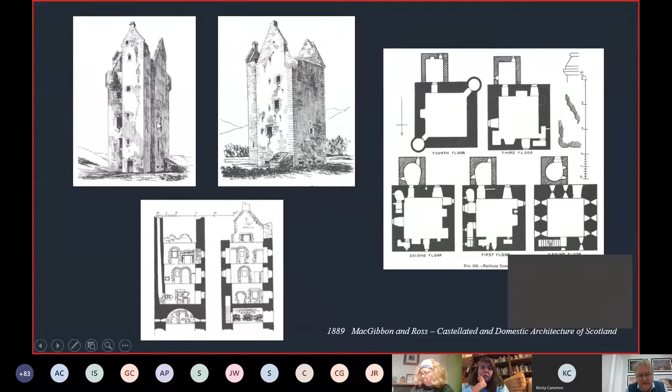MacGibbon and Ross in the 1880s did the first survey of the building that we know about, with the help of a local architect as well, who sent plans, and they did a basic phase plan. And the very obvious thing to say is, in terms of its evolution, the stair tower is an addition, and that's clearly shown here. So that's a stair tower. You can see it very much looks like it's stuck onto an earlier building. So some basic facts of the tower's history were known.

This is our earliest photographic image, circa 1880, a fantastic image showing the tower in splendid isolation, with the cottage that still survives as a ruin on its side, but at that stage still retaining its thatched roof. And you can see that there's two chimneys, and here there's an internal cross wall, and you'll see the remains of the fireplace in a slide later on.

If you just bear that in mind, by the beginning of the 20th century, the cottage was beginning to become derelict, and by the mid-century, half of it had already gone, and the thatched roof on the other side of it had been covered in crinkly tin zinc roof. But very much both the tower and the cottage were derelict, completely roofless by the 1950s. A later agricultural building was built up against the side. This collapsed probably about 10 years ago or so, and so we're dealing really with the ruin of the cottage today and the tower itself.

So what have we been doing? After the history, we did an assessment of the building in 2017, which was an initial look over as access permitted, and it's not a safe building, so we had to be very careful with what we saw, and we didn't get into many areas. That led on to a building recording exercise, and so I'll take you through our methodology and what we've been doing at Fairburn.

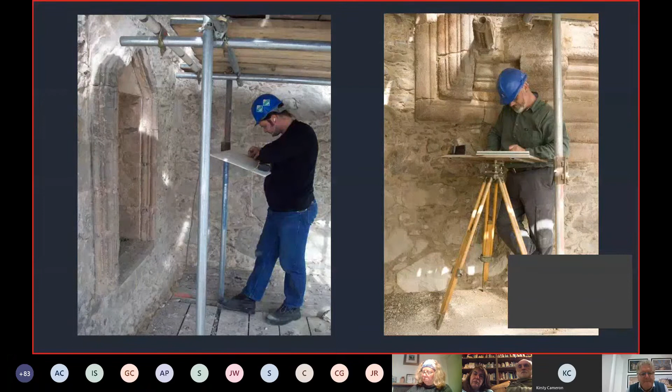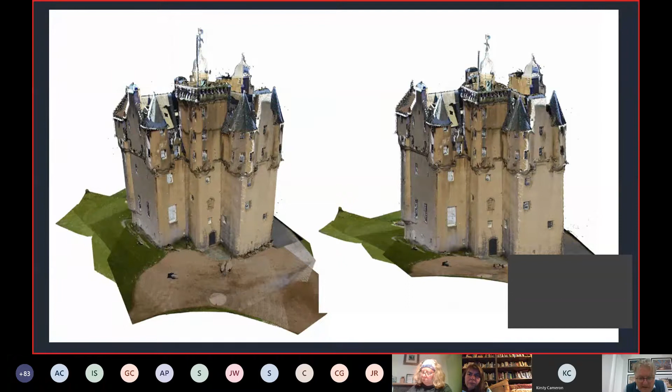In terms of digital techniques, it's a combination of techniques to best effect, focusing them on the subject, using whichever one works best. So here we have Craigievar Castle, which we did a few years ago, with coloured laser scan imagery to create a three-dimensional model, and that's to act as a survey control. Given that you can't just put a tape measure up 6 stories, you need some way of controlling your images, and from that you can generate two-dimensional projections.

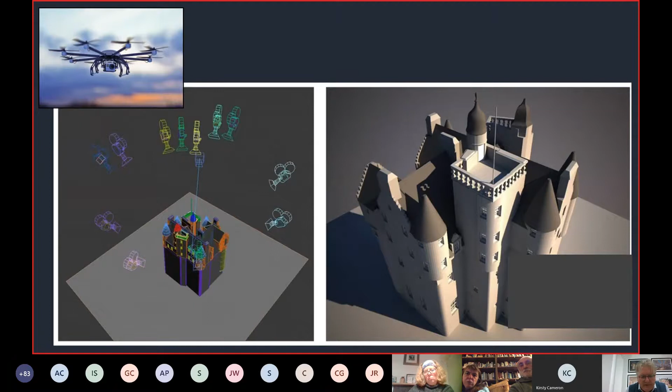We've also at Fairburn and at Craigievar used digital modelled photography. This at both sites involved using a drone to take stereo pair photography from high level all around the building, put it all into a computer, and it creates a three-dimensional digital photographic model of the structure, which is an incredibly powerful tool, particularly where you can't get to roofs and the upper parts of a ruin without scaffolding.

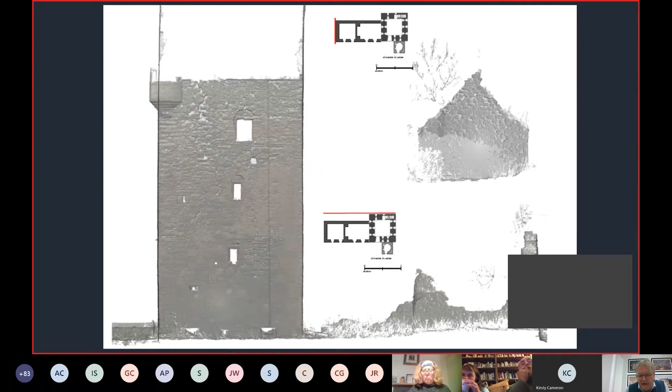So at Fairburn, this is one of the elevations of many that was generated from the laser scan data. So this is the grayscale data of the back of the tower, which we then use as a basis for our survey work. And I'll take you through a few of these. It's an incredibly powerful tool.

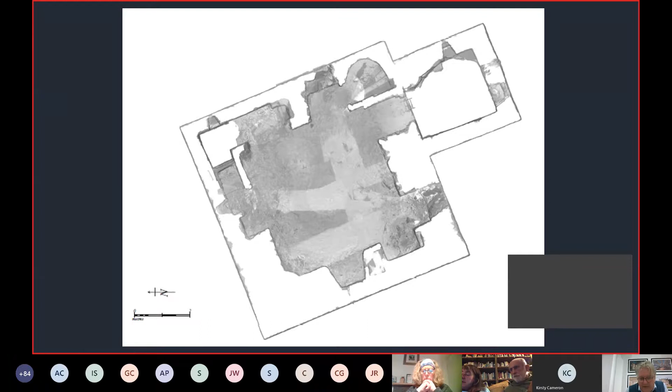So floor by floor, that's second floor. You can see the different chambers, third floor. And these are all perfectly lined up above each other. And there's the wall heads, and you can see the bartizan turrets at the very top, and another fireplace. The top of the stair tower had a little cap house.

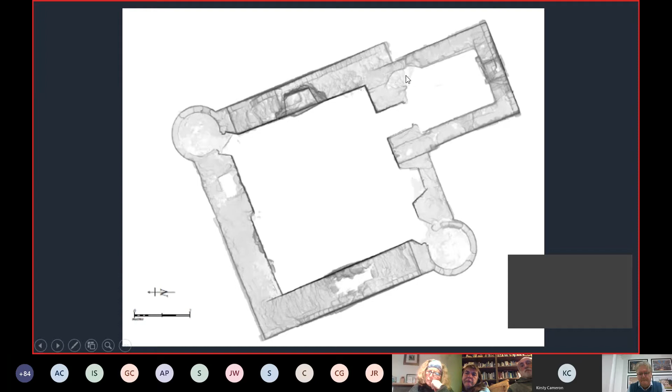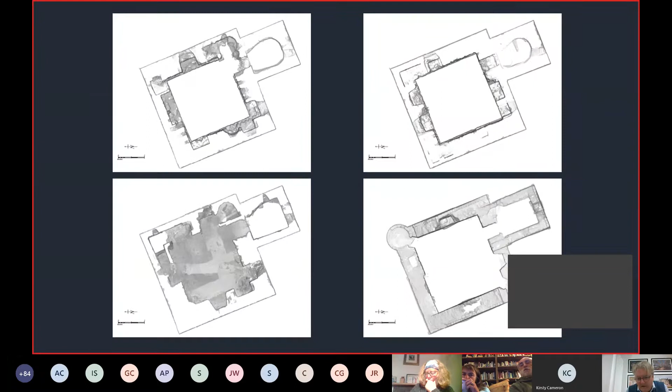And you can just see how incredibly easy and useful this is as a tool to survey a building. And bear in mind, it's a dangerous structure, so physically you're not even getting near it in order to collect this data. There they are in sequence, one above the other.

And it gets really fun when you have this modeled imagery for the interior as well. You can do slice throughs vertically and horizontally in any direction you wish. So we've actually had a great deal of fun with this survey, but you can immediately see how complex a building it is and how many mural chambers and fireplaces and windows and so on.

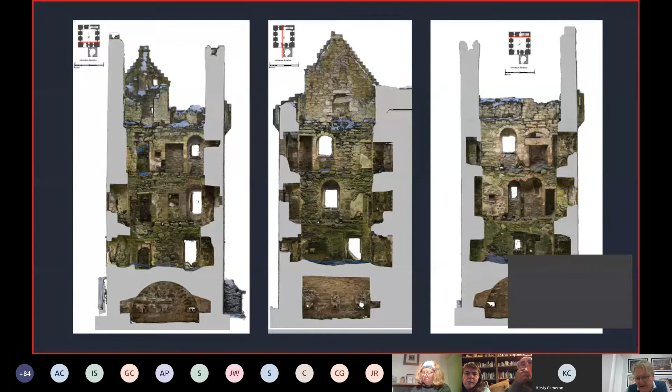So I think the actual survey on site with all of this digital was only a few days, and we used it to generate very detailed drawings. And so this is an example of the elevation done from photographic modelling, and then literally tracing it off. And you can see the sorts of things we're looking at. These are historic surfaces, lime finishes that survive, the individual stones, the principal features.

And as you stare at it more and more and look on site, you can pick up different phases. And so we know the stair tower is an addition, but we quite rapidly just worked out that the top part of the tower was another addition. So the original parapet was built off, and they built an entire additional story on top of the building.

And so we're colouring those phases, and you can very easily and quickly communicate the history of the building by doing that. And so you've got this original tower, which is the Mackenzie of Fairburn Tower from the 1540s. We think the stair tower, the bartizans and the cap house were all added in the early 17th century. And then a whole series of later things, early windows got blocked up and so on.

And you can see here, this was the agricultural shed which had collapsed, but left a scar on the side of the building. And here we are systematically going through the evidence, both to try and create a formal record of the building for posterity, to really understand its evolution, and a lot of this information is then fed into the conservation planning process and information that the architects will take forward. And they've used these drawings as a basis for their own drawings. So it's all quite an integrated procedure.

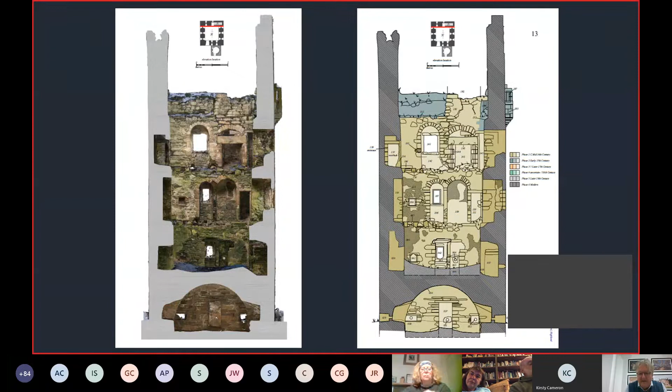Again, cutting through the inside, here's an example of our drawing on the inside. And you can immediately see just how complex these features are and how densely packed they are into what externally looks like a very simple building. But inside there's all sorts of things going on. And we haven't even physically got access to it yet, so scaffold hasn't got up to the interior. So there's still a huge amount to learn, even though these look like detailed drawings, they're not finished.

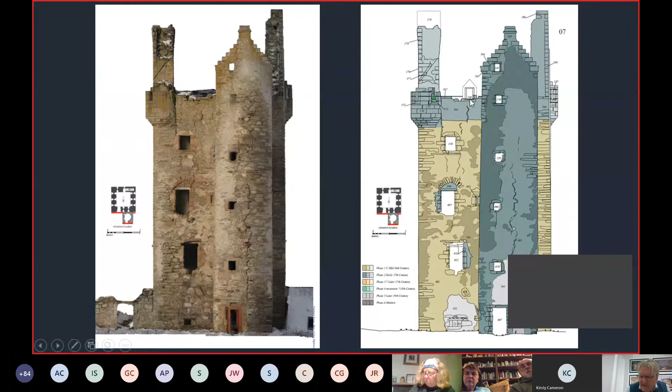And again, I'm going to zoom in on one or two features and illustrate the sort of information we're beginning to get out of the tower by looking at one or two things. So I said the top floor had been added with the little bartizans, and from below you can actually see what looked like a windowsill. And as we got up there, that's what you can see from below. And that could be quite important if it were wished to restore that feature, for example. And so it's quite useful to get up there and know about it very quickly.

Another feature that we saw from below, which we're very interested in getting up to see in close detail, you can just see those two stones sticking out.

And we know that the top of the building was rebuilt, but this is the very top of the original. And we think that's been cut off, and it's probably a garderobe, a toilet, from the parapet level. So you'd go up for a very fresh air toiletry experience on the back of the building there. And we think that was cut off when they rebuilt the upper level. So there are fascinating little details everywhere you look.

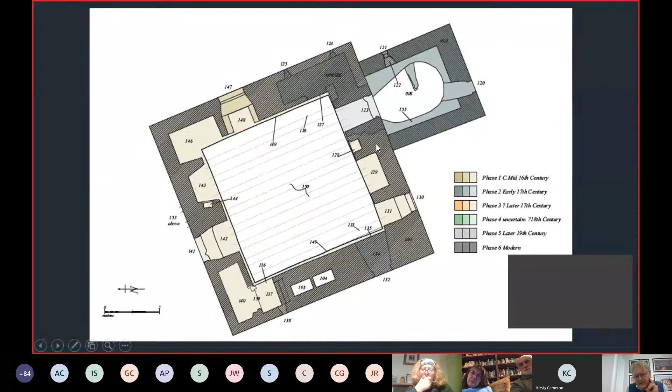It's a very finely detailed building, and quite remarkable in its design in a number of aspects. And at basement level, you have this vaulted cellar, which is still intact, and on each wall there are three recesses, each with a small gun port. And one of the most extraordinary things is this timber seating, which is for an arquebus or a small cannon, basically a swivel gun. And this is an incredibly rare survival, so it just shows what does survive at Fairburn. Little details like that tell you so much.

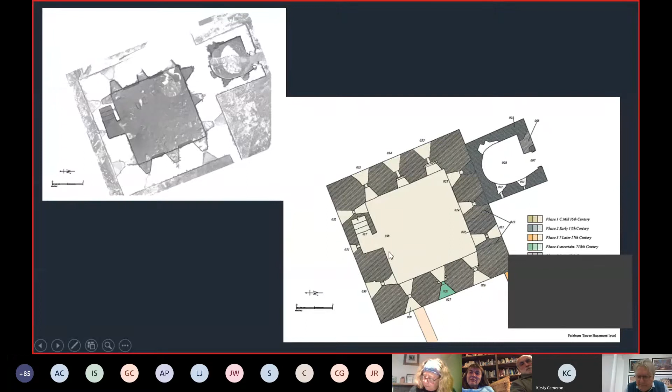Here's a scan, but in plan you can just see the arrangement of gun ports. So this is an unusually large number for a very small tower house. There are three on each side, incredibly scientifically planned. Murdoch Mackenzie was a courtier, and although he wasn't rich, he was very much in touch with the latest ideas about armament and defence and quality of construction, and all of this appears at Fairburn, which is another reason why it's so remarkable. Hamilton of Finnart was the cousin of the king and very much in touch with Renaissance ideas of fortification, and there's every likelihood Murdoch Mackenzie would have been very aware of these principles coming in.

Here we are. So this is the incredible array of gun ports at ground level, shooting out from the basement, and some variation in detail. And you can see coming around the side, and also elsewhere there are pistol loops all over the place. This is inside the stair going down to the cellar, and it's got pistol loops all the way down, and you just see one here, the stairs going down there. That's from the inside. So fascinating details, lots of very subtle details as well, separating out mason's marks from the original construction from the 1540s, and then obviously later graffiti as well. All of these things tell you little bits about the history of the building in different ways.

We had a great concentration on the building materials. It's very interesting because it embodies field stone, sandstone that's imported, slabs of more local stone, tying in a huge amount of geological information there, a lot of it very local, but some imports. There are fantastic surviving remains, absolutely remarkable, of the original surface finishes, a whole sequence of different layers of lime application, roughcast harls, and internally as well. In some areas, the internal wall plaster still survives. So a huge amount of detailed information, some of which has already been assessed and appears in a gazetteer, a technical paper by Historic Environment Scotland.

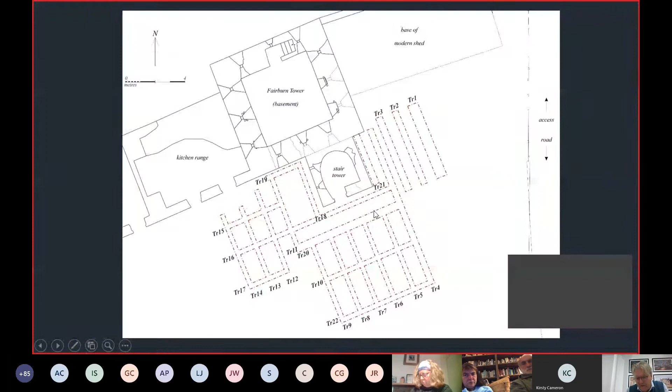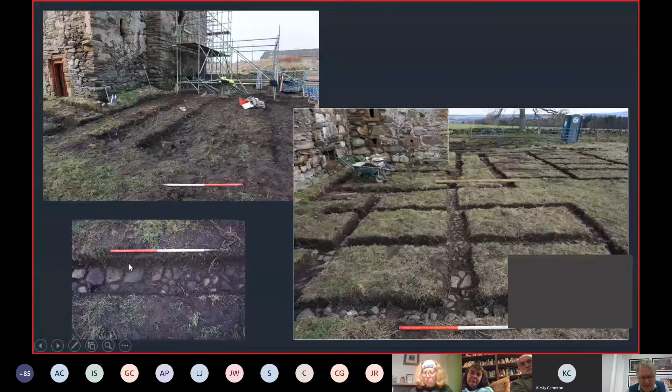So you can see this scaffolding that's been put up. There was some suggestion that cobbling or other remains might survive around the base of the tower. So we did a little investigation where the proposed scaffolding was to go, a very odd sort of archaeology where we did a grid of trenches and very rapidly discovered very extensive remains of cobbling in most areas. Clearly a well-preserved, probably courtyard cobbled surface.

A little bit about the conditions. The site is quite damp, and a lot of this work was done in February this year, just as the weather turned bad. And so we had a pretty miserable time of it, including flooding, and a lot of the topsoil just turned into liquid. So it was, as you can see, an unpleasant experience. And it was decided to clean off these cobbles.

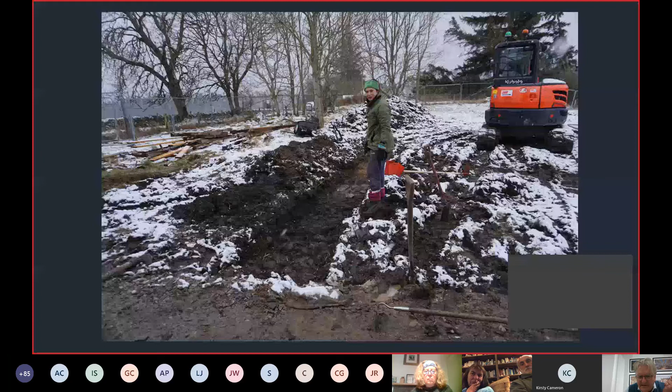Here we are. Here's my colleague Alice, who's having the time of her life in the snow, digging away. Kenny sort of hoovering mud off cobbles. But as it happens, if you clean mud off and polish the cobbles, you can get an amazing result. And so this is how it ended up. Fortunately, we had a dry spell and all the mud dried off, and we were able to clean the cobbling. An absolutely spectacular survival of a courtyard surface.

You can see this is looking eastwards along the front of the tower. There's a stair tower. And you can see the beautiful individual panels. Cobbling was laid in panels. And there it is from the tower looking down. And we think that there was probably an entrance up on this side. The tower is at the bottom, and you were encouraged to come into the courtyard here and then round to the tower. And so I think the cobbling is encouraging direction of movement, but also cobbling stops.

And we think there were structures around the courtyard at the point where the cobbling stops. But you can also see there's a lot of damage in some areas, so it's not a complete picture. We did digital modelling of this in order to generate a plan, and there's a plan. It's a thankless task drawing cobbles; you can digitally quantify it. I think we got to something like 5,000 cobbles. But you can see here very clearly the different panels of the cobbles, and some interesting patterns.

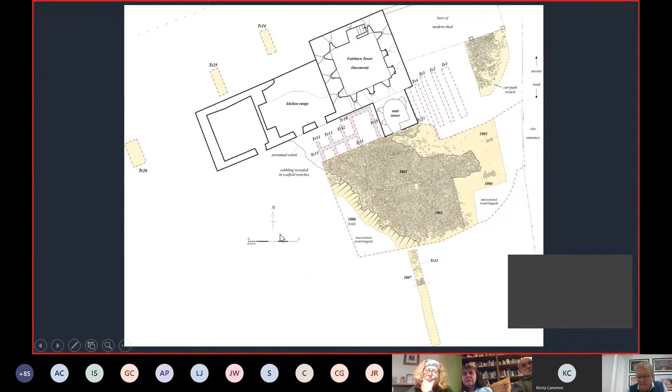Other things that we're doing on site, all sorts of different soil investigations. This is along a route for proposed services. We're just testing to make sure the service won't be damaging something like this. So if there are more cobbles, we'd have to look very carefully about where to put services. So a whole series of trenches within the wider site.

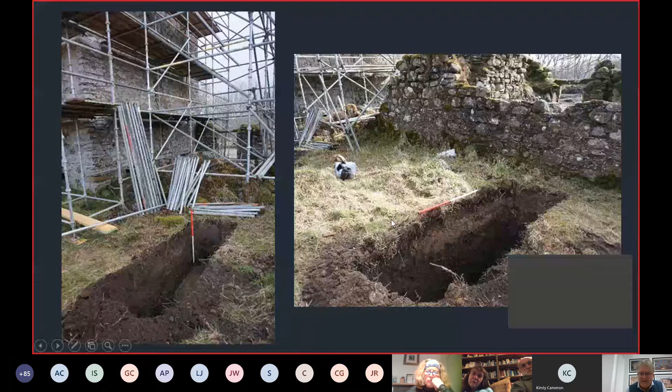On the north side, which is against the back of the cottage here, not a great deal in terms of significant archaeology. No cobbled surfaces, for example, and this is clearly outwith the main courtyard area. Another grim photo, and some of these trenches digging in waterlogged conditions, so the cobbling peters out as you go southwards, and here we have a footing of what must be a structure.

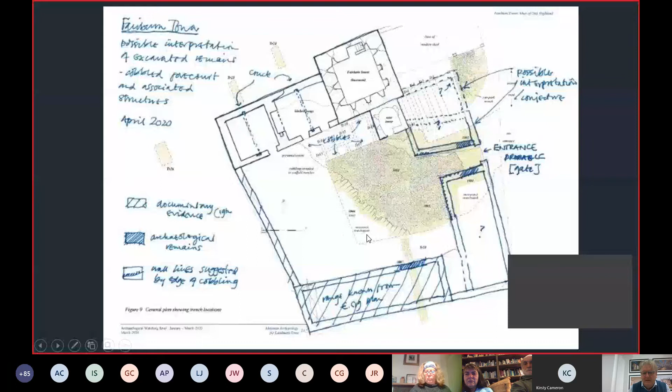So I'm not going to get into all of that in great detail, because this really is a state of the moment, and this is our current thinking sketched out of what it all means. We haven't got much further than this, but that last trench picked up a wall footing here, and some of those early estate plans show a structure at that point, so that seems to tally fairly well. And this may be a gated entrance bounded by structures on either side. So that's just the sort of thinking about the early form of this compound.

So going forward, we were just going up on the 23rd of March for the next big tranche of work, when the Prime Minister made his announcement, and we had to do a U-turn and come back again, and the entire country was locked down. And so that was the moment when the project halted.

Really, it's only now just starting to open up again, and we were hoping to get back onto site early August, and we discovered that in our absence during lockdown, you can just see a bird up here, barn owls moved into the tower, and so that delayed work until September. Three barn owl chicks here. Cameras were put in, monitored every week or so, waiting for them to fledge and fly the nest.

By early September, two of the three chicks had gone, but you can see down here the last chick still very much in residence until mid-September, a sort of stay-at-home teenager who just didn't want to go. But finally the chick has gone, and we now have access to site, so things will begin quite soon.

So I'm not going to spend too much time talking about LiDAR itself, partly because it's becoming much more familiar to everyone now. I think most people have seen the application of LiDAR, certainly in archaeology. There are even regular TV shows demonstrating how powerful it is. But it's equally significant in its contribution whether you're working somewhere like Mesoamerica, looking at remains underneath the canopy of rainforests, or in the uplands of Scotland. The kind of information that we can get from this high quality data is really quite something.

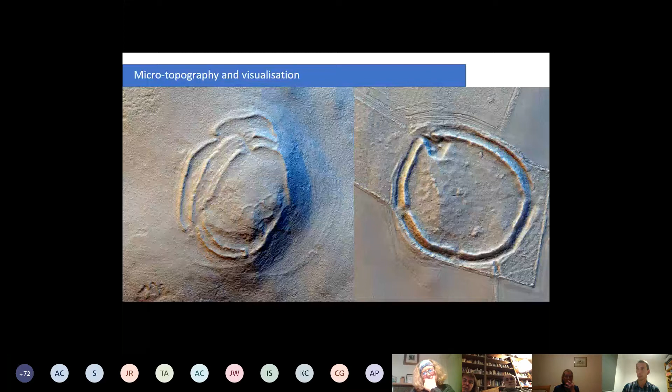And these are just good examples of projects we've worked on in the south of Scotland, one of which is ongoing at the moment, which I'll say a little more about later. But you can see that the value of this stuff stands for itself. Just having this new information about well-known and well-surveyed sites gives you a new angle on looking at them, and new information always comes out. And obviously the major advantage of LiDAR is that this isn't imagery, this isn't photography. This is 3D data that can be manipulated, reworked, reprocessed, and new information will come out of it.

And just to give an illustration of that, this is a simple hillshade of a fort in East Lothian, but by some fairly simple enhancement techniques on the way that data is rendered, you get so much more information out of it. You see internal features within the fort now. And those of you who have got big enough screens might just about pick out the possible traces of a palisade slot. Again, completely invisible in standard photography, but the kind of thing that gets pulled out of the manipulation of this 3D data.

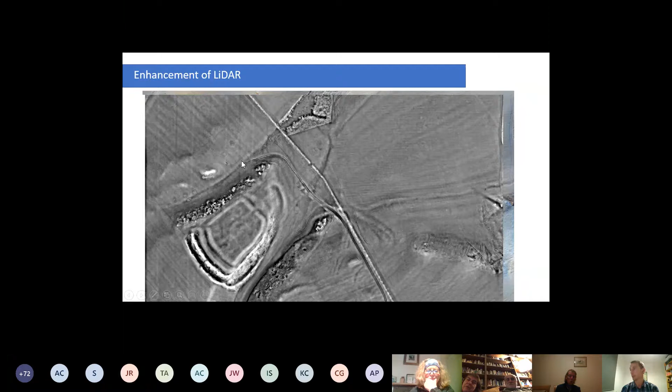And for much of the Highlands, there's really not been systematic survey undertaken at all on a landscape scale. So you can see these really condition what we know about these areas, and also it's important to think about the way that surveys have worked in the past, whereby the Royal Commission would put labels on things and classifications on things based on their understanding of the archaeology of that area.

And it's just worth reflecting that when you have such incomplete coverage, it's quite feasible that we should be thinking about major overhauls of a lot of our conventional wisdom. And I think that's something that LiDAR is really going to bring forward.

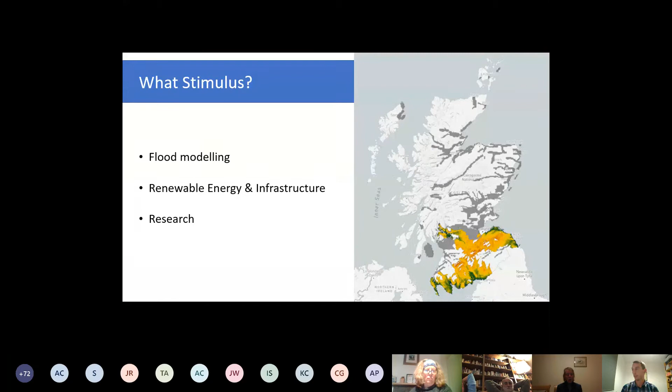But I just wanted to flag up that it is possible to collaborate on the design of these projects, and when they come online for all the stakeholders, people that could make use of the data, to make that known, so that the data is made as available as possible, and that can and does happen. So it's something that should be shared, and that's something that we should be aspiring to.

One source of LiDAR data for the Highlands so far has been some wind farm developments. Again, it's the renewable energy sector collecting this data for various reasons. Obviously, the microtopographic data that they get from it is very valuable for planning purposes, but also because it provides such a spectacularly useful baseline record of archaeological sites.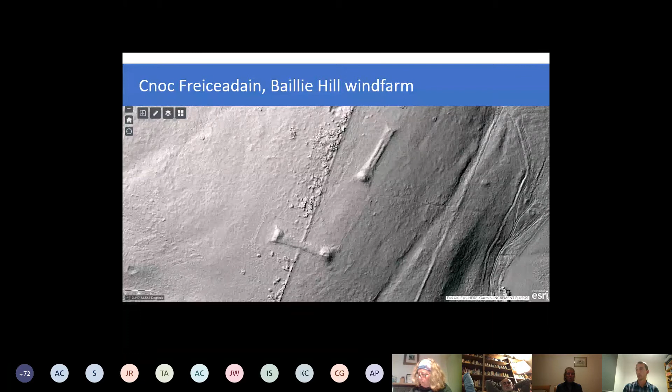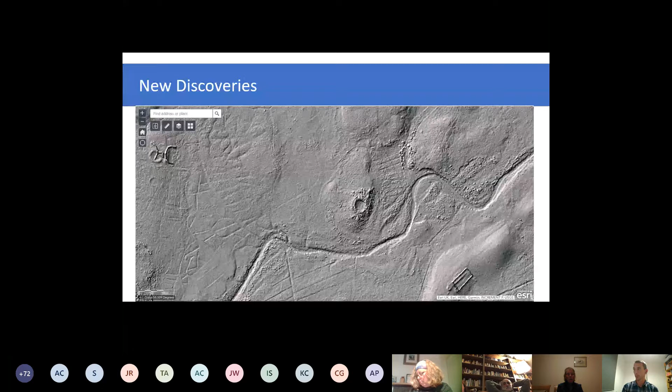But also the new discoveries, areas that people haven't walked over, or at least if they have, they've missed these slight features, some of which are fairly ephemeral traces, like the remains of hut circles and field systems, but also including quite substantial structures. This is a very chunky building in the Baillie Hill wind farm dataset, which may well be a broch in Caithness. So really quite substantial and significant monuments come to light through this data.

But again, I want to think more tonight about the value of the data beyond just the discoveries that we're going to make. It's always nice to find new cairns, new hut circles, new field systems. But I think that to make the most of this data, archaeologists need to be thinking about the strategy in a new way.

So for the first time, rather than having to rely on paper maps and existing HERs, some of which were compiled from records many decades old, if not getting on for a century old now, we're able to look at the landscape on a big scale and plan how we might find out more about that landscape based on what we can see.

So that means that we're able to target areas for prospective survey, things like geophysics, field walking and test pitting. And by modelling the distributions of archaeological sites and activity, find spots against this sort of micro-topographic background, we're building up a much more nuanced understanding of how the landscape comes to look the way it does.

And I think, again, it's important to think about what archaeologists have traditionally classified things as being. We talk about marginal land in archaeology, and that being where the archaeological survival is likely to be highest. But I think that's certainly a concept that we need to be thinking about challenging. Is it always the case that the most archaeological sites turn up on the least touched land? Do they always turn up on the marginal fringes?

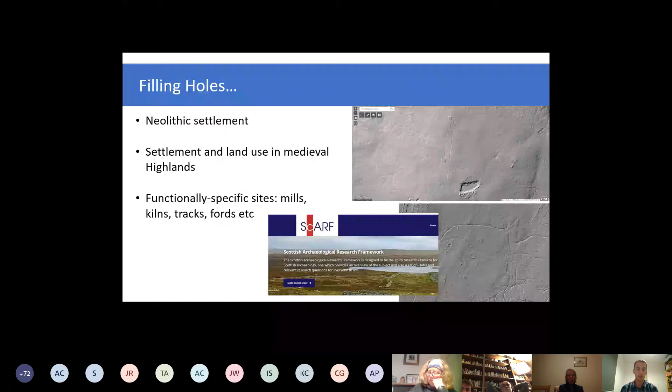And I also think that it should be easier to find functionally specific sites. So when you have the topography, you have the flood and drainage models to work with. Sites like mills and kilns, tracks and fords, the kind of things that we don't have an awful lot of archaeological research on in rural Scotland, should be easily studyable. And not only that, but we should be able to predict where these things will turn up based on the topographic logic behind their position.

This concept of topographic logic is one that I think about a lot, and anyone who's done archaeological survey, as many of the people listening to this have, I know, you'll know that when you're surveying, you tend to start to develop a feeling for the area you're working in. You know the types of landscape that you're likely to find a hut circle, where a burnt mound is going to turn up, where you could expect to find a relic prehistoric field system, that kind of thing. But I think that LiDAR gives us the opportunity to test that, because I'm always very wary of this idea of conventional wisdom.

And as pioneering and as invaluable as the work that the Commission did in the 20th century, the Royal Commission, it has also constrained our thinking into a series of categories and boxes, that you only find these types of sites in these locations. And if you find a site in this location, it must be one of these. And the more you look at LiDAR and the more you work with LiDAR as a tool for landscape archaeology, the more you start to get an understanding that there's lots of sites that break these rules, and it leaves you scratching your head.

And to me, I think that this is one of the most exciting areas for the application of LiDAR survey, because we can start to look at these things that don't fit our models. Like, why is there a fort in a place that we shouldn't find a fort, for example? Are there burnt mounds with no obvious water sources nearby, this kind of thing. And I think that needs to force us into looking at our thinking and examining our logic about why we're putting certain sites into particular boxes.

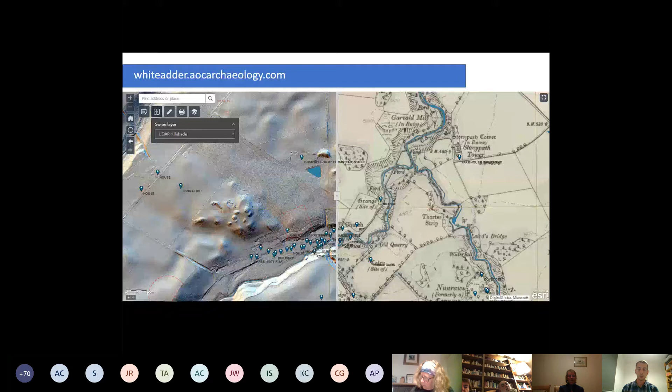Just by way of an example, I'd point you towards a project I've been working on with colleagues at AOC and Scottish Borders Council and East Lothian Council on some of this data from the Phase 3 data set. And this is based around the Whiteadder river catchment, which runs through the Lammermuirs. And basically what that involved was putting all of this data online, integrating it with the fantastic resources that you can get access to through the National Library of Scotland, HER data from both the local authorities and from HES, and compiling this all into one web map that anyone can access. And that just allows you to zoom into this LiDAR data, look at features that you think might be of interest, and tag them on the map and submit them to the project for further research.

And I really think that initiatives like this, although we're in the very early stages of figuring out how all this can work, how we can manage this data, and how we can marshal it into coherent and valuable research projects, this really seems like a way forward to me. Because there's always so much to find and people will always see new things in the data. So this kind of map research, comparing it to HER data, the kind of thing that Dave Cowley and his team are doing at the moment with the RAMP project at HES, we're going to see more of in the future, and everyone has a stake and everyone has a role to play in this.

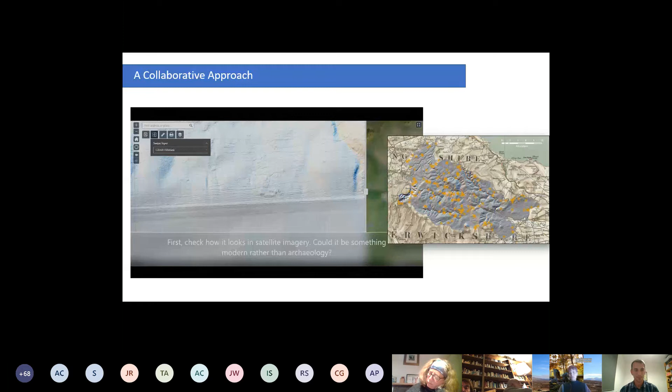It is actually kind of overwhelming when you see how much information we have already and how much is going to be there. To start the ball rolling, from my point of view, I've got a quick question about planning applications. I'm assuming the cost is quite high at the moment, but I assume it's coming down. So at the moment we can justify asking for LiDAR for extensive applications like wind farms and things like that.

Do you think it's going to come down where it might be possible to ask for small housing developments or something like that, or is it always going to be better to do the large scale surveys? No, you're absolutely right, and already LiDAR being acquired by drone is being done routinely now, and that's something that was often thought of as one of the holy grails.

If we can start doing small areas using drones to capture the data, then we'd be able to do it much more routinely for small sites, as you say, because one of the things about the acquisition cost is that if you're going to pay for the aircraft to get up there and take the data, it may as well survey a few hundred kilometers, because once you've got it there, it can do that in a day. But it's quite a big cost to get the airplane in the sky to begin with.

But you're right, the prices are coming down. Even the cost of airplane acquired LiDAR is quite a lot lower than it used to be. But also, I think you're right that drone applications of LiDAR are going to be much more routine, and we're going to see that in smaller scale projects too.